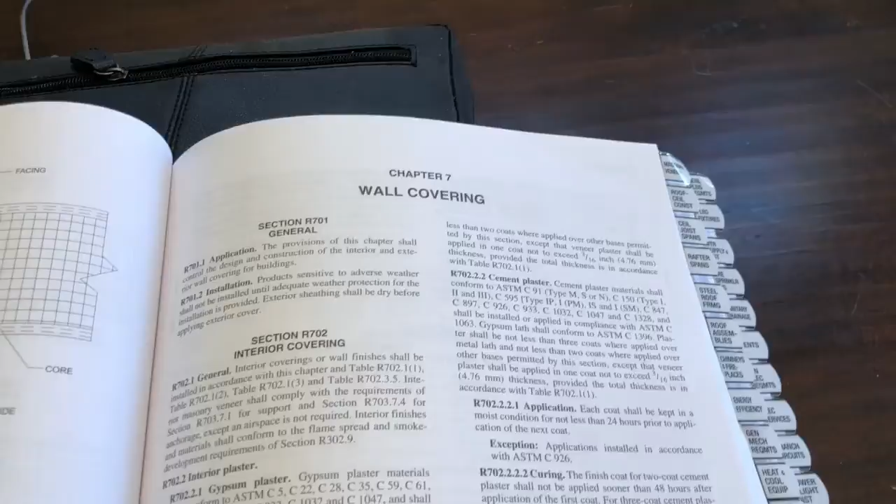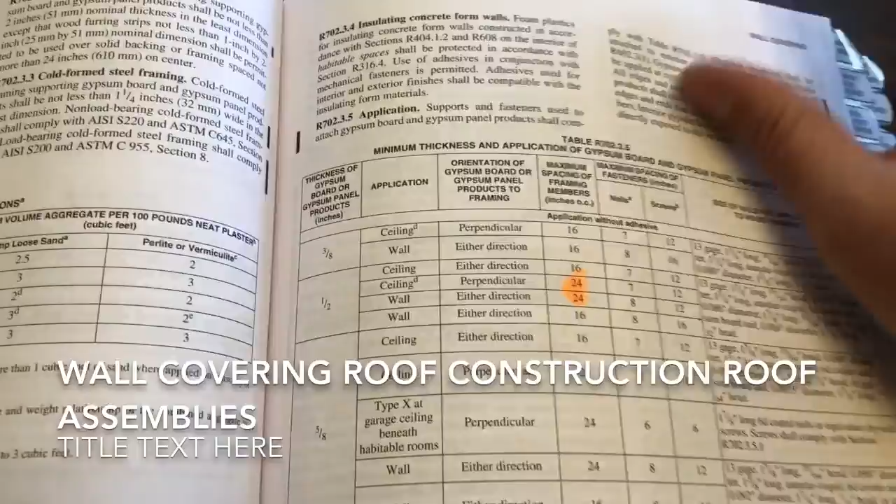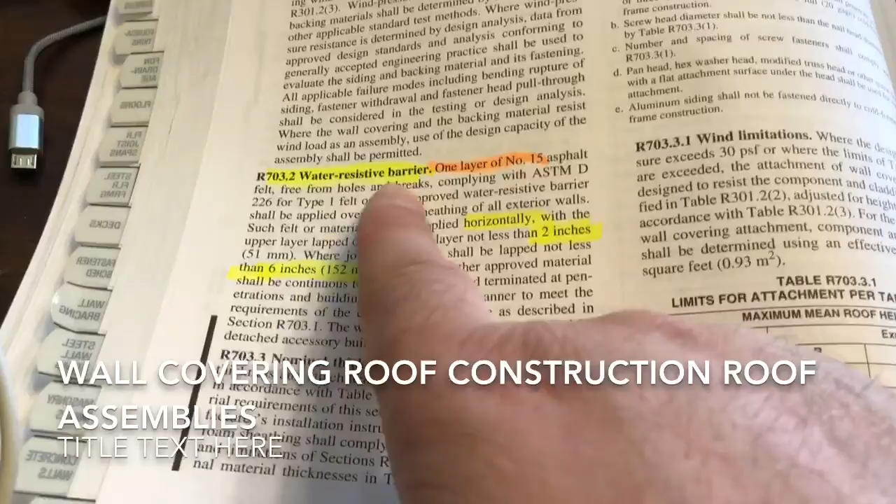Okay, next section is wall covering. Know the maximum spacing for 1/2 inch is 24 inches. Just know this table, it's pretty easy. Got to know how to get to these sections. Anything else? Know that you need a water-resistive barrier, it needs to be number 15. Asphalt needs the lap, the 2-inch and 6-inch rule. Know that.

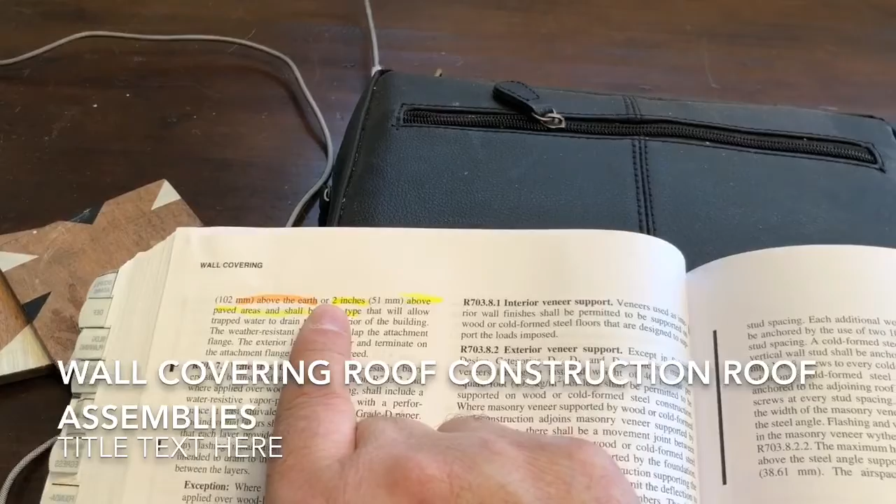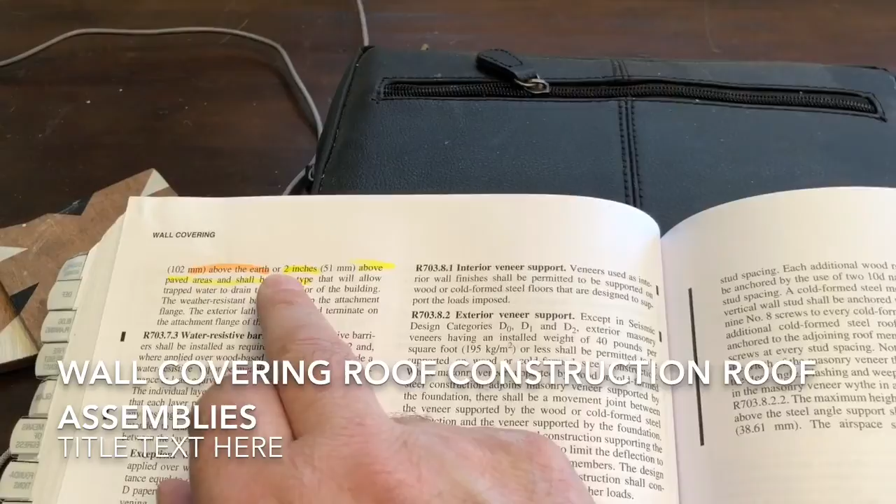Okay, weep screeds, this one comes up quite a bit. So know the 4-inch and 6-inch rule for masonry, but 2 inches above where there's concrete, right? Where you have like a sidewalk outside, you can go to 2 inches minimum, or 4 inches. So know that.

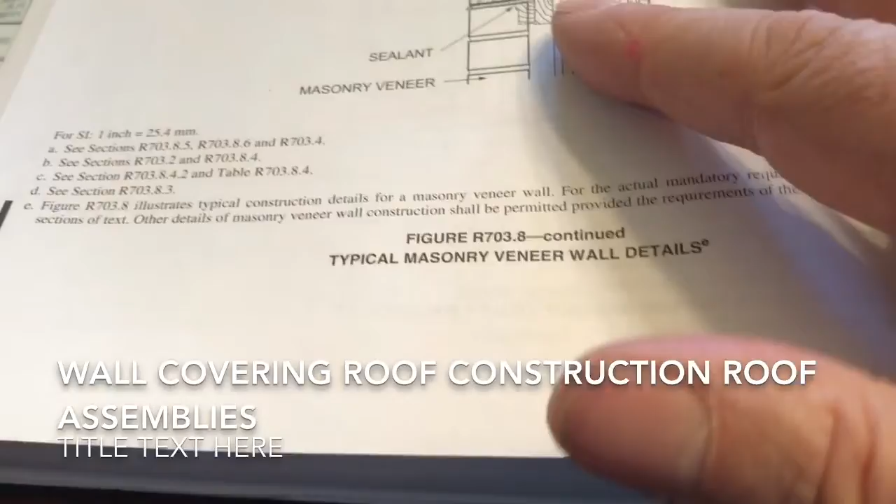Anchored veneer masonry needs to be anchored. I don't know when I got that one, I don't remember that one. I got it highlighted, okay. Know this: the space between your masonry block and your regular wall can either be 1 inch airspace or it could be grouted. So know that space could be either or.

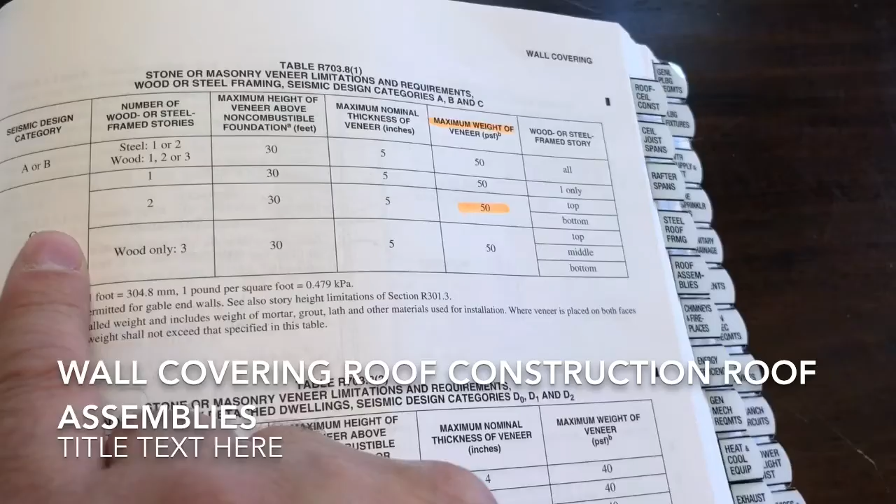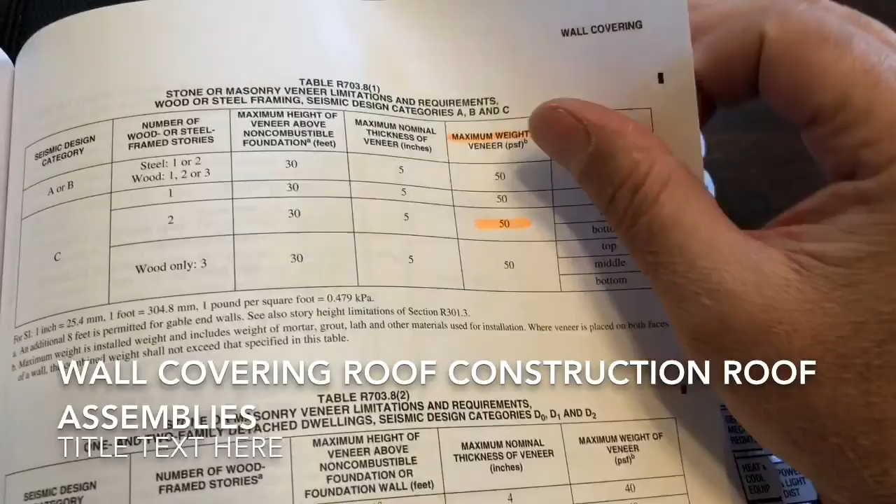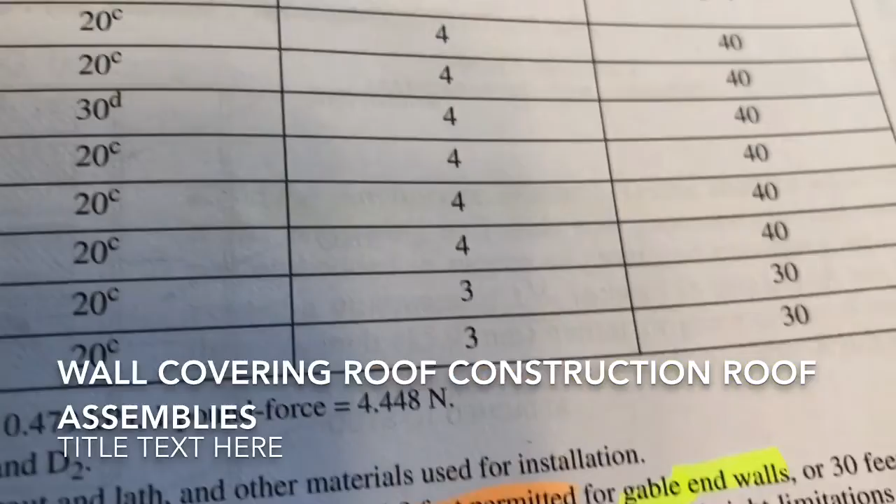The maximum weight for in this category, 2-story, is 50 pounds per square foot for stone masonry veneer. Know this. Know that there's an exception for the height of that, basically it's 20 foot plus 8-foot gable, that gets you to 28 feet. So know that, so you can go above the height that the gable ends. Those are the exception, so don't forget to look at those little footnotes.

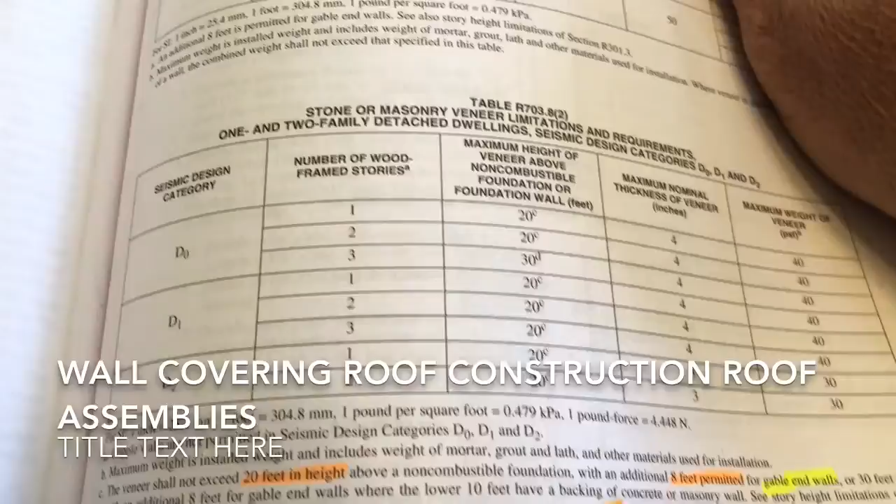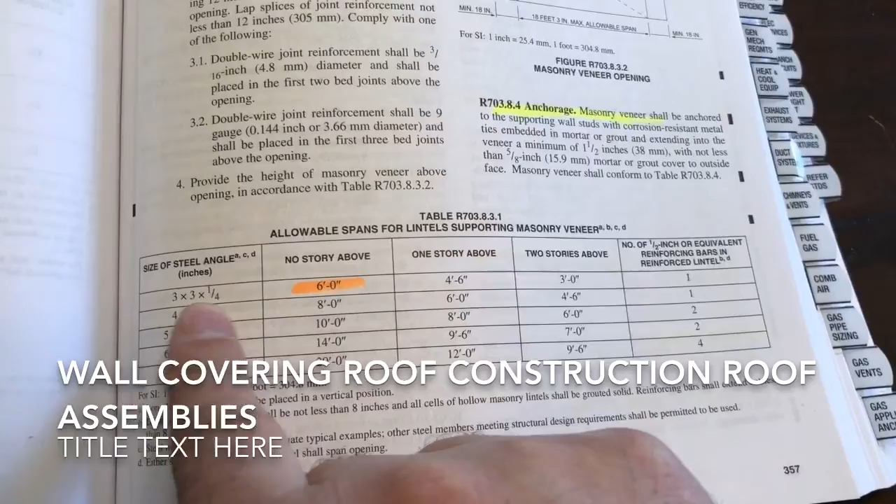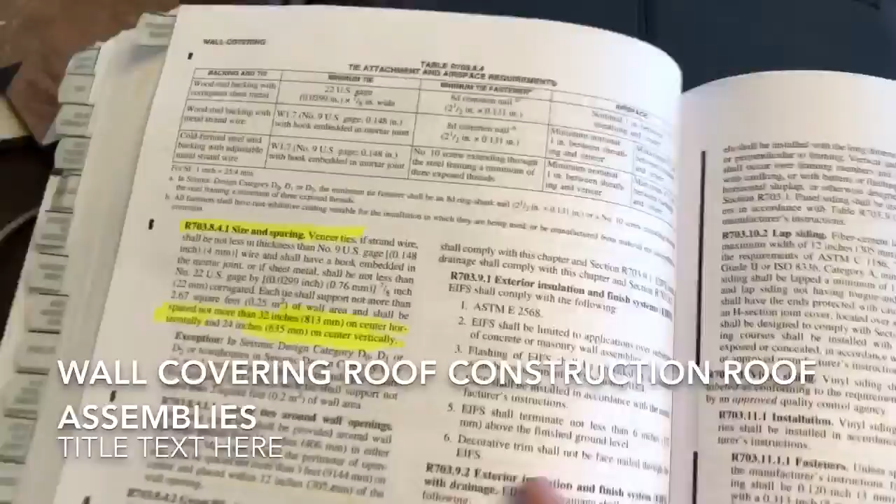Okay, anchorage. Oh, the lintels, it'll just give you a 3x3, and it'll tell you what it is, and 6 foot. So that's basically how I came up with that one. Size and spacing for ties, shall be 24 inches on center. And

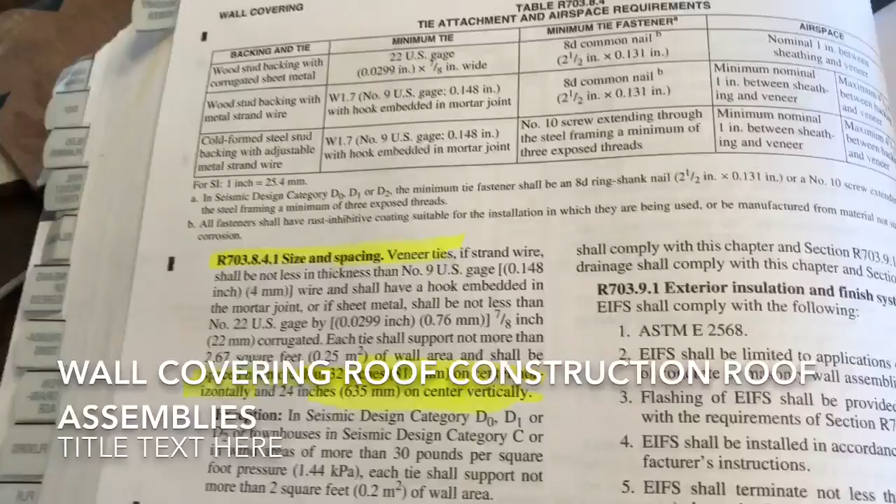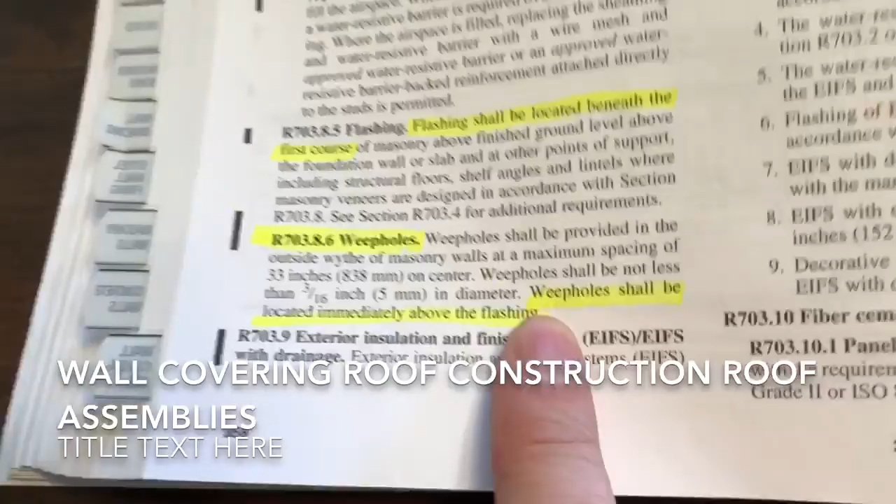Here's the weep holes. Weep holes shall be located immediately above the flashing. That's key. Okay, I don't know if there's any more wall construction. Nope, that's it for wall construction.

Ceiling construction. Know that the ridge board is not less than the depth cut at the end of the rafter. Okay, know that.

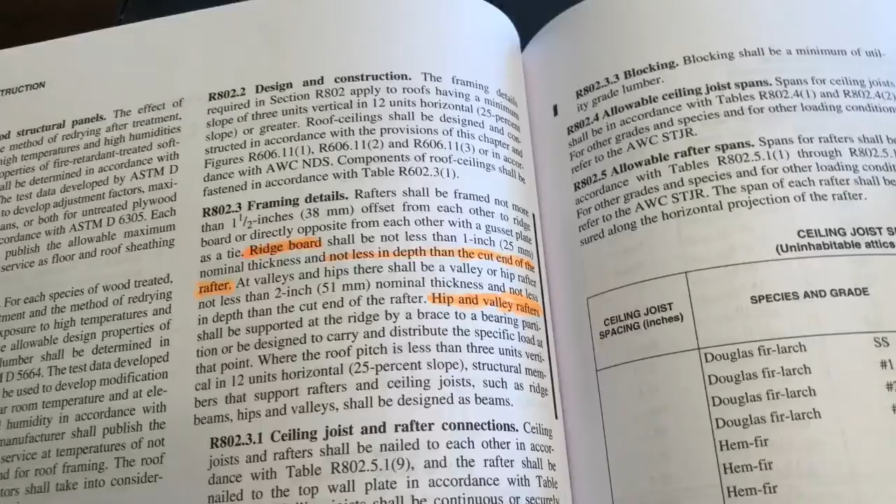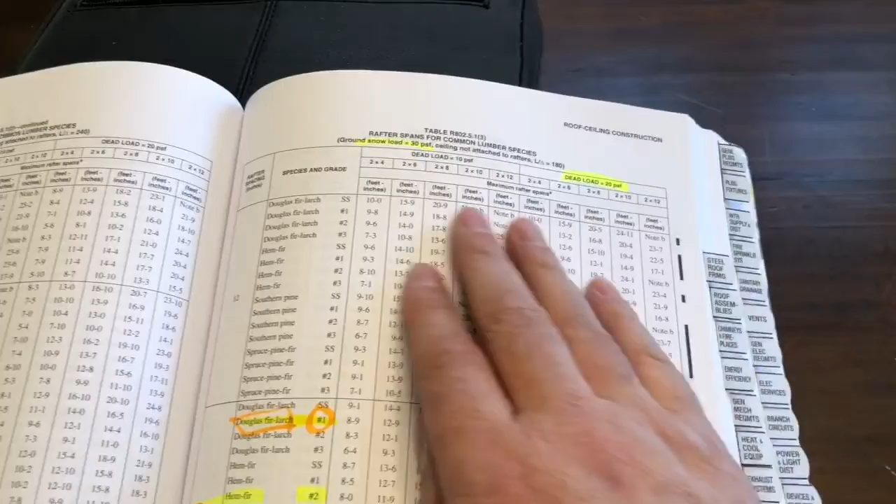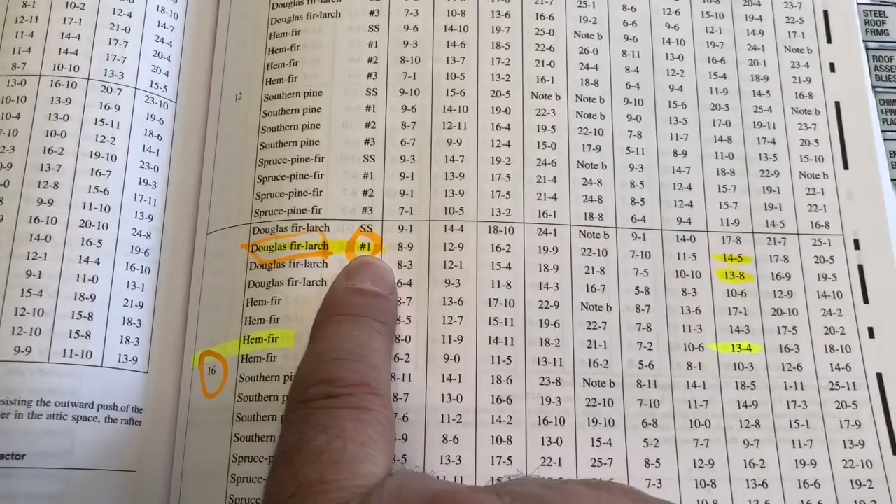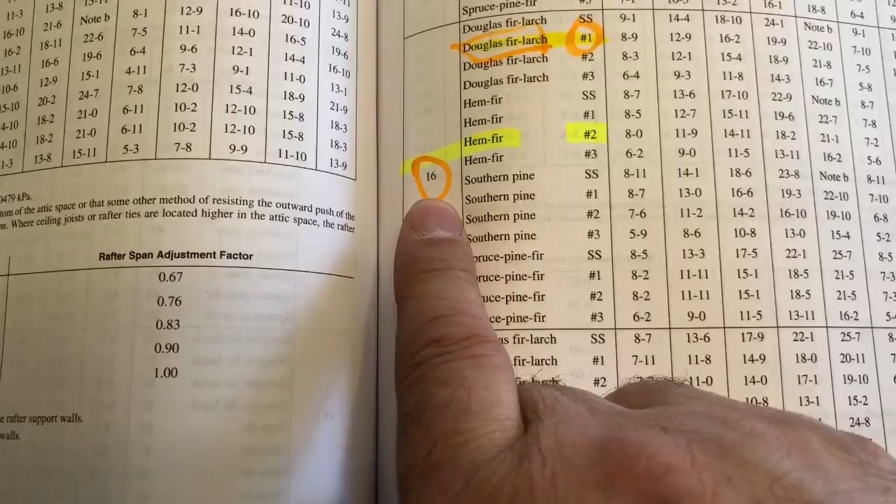These questions, just know these tables, you'll get them. They're going to be giving you the dead load, they're going to tell you the rafters, common rafter spans, they're going to give you maybe the name of the wood that you're using, and maybe the structural strength, and then you'll come up with the allowable 2x8 for that. Or like here, I got a Hem-fir number 2, 13, 16 on center. I got circled, so it was a number 1, 16 on center. So yeah.

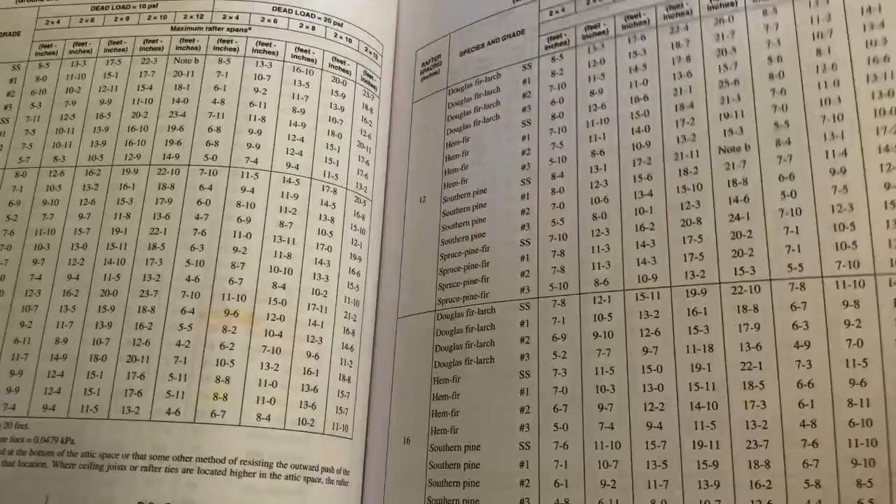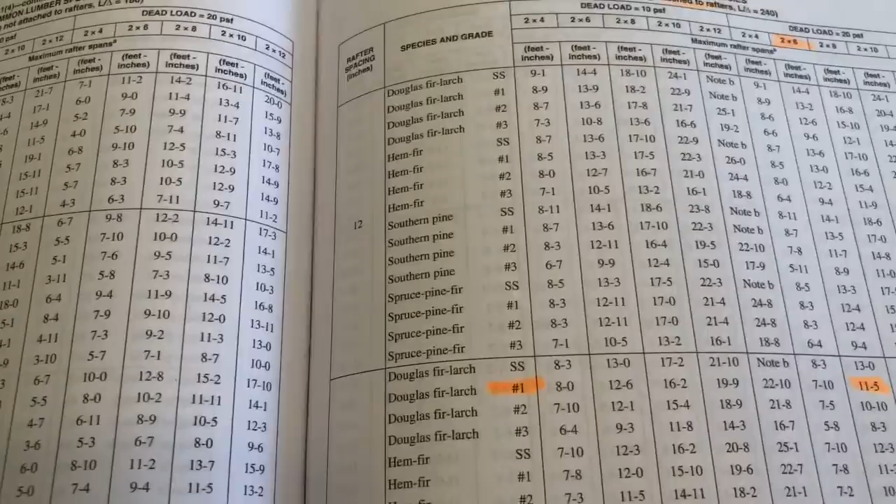Just know how to use these charts, they're pretty easy. Make sure you're reading the question completely, because the question is going to put you in the right chart, remember that. So here you've got using a ground snow load of 30 pounds per square foot and a 2x6, and 16 on center, you can use a number 1 at 11'5". So just know the question, because the question is going to read just like that.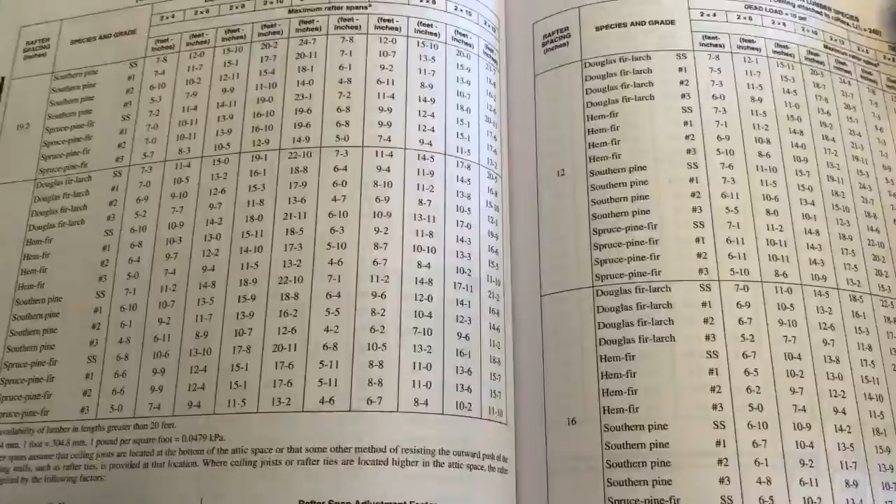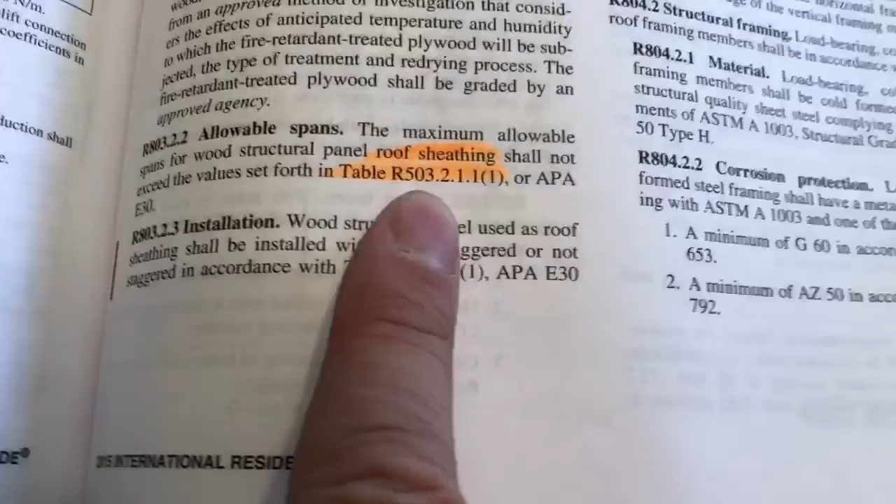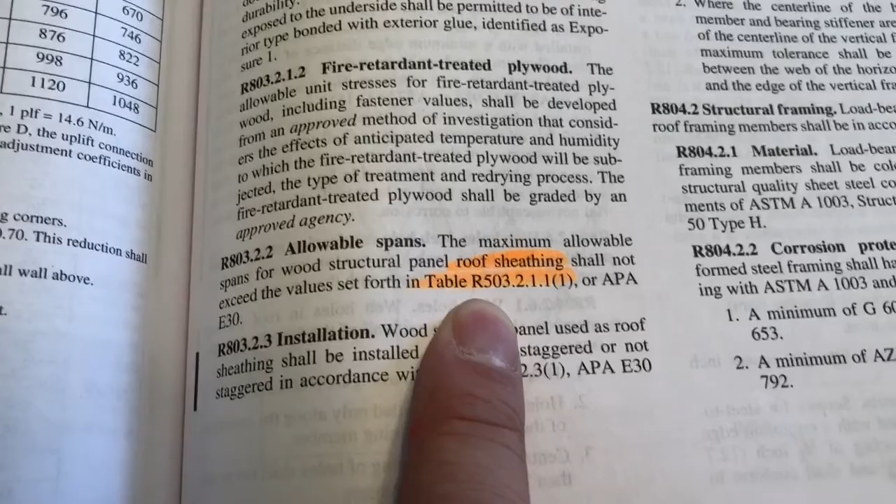Okay, roof sheathing, just refer to this table. Roof sheathing puts you back in the floor section, that's why it's here, so know that. I have it highlighted here just to put me, because you need to know what you can do with a 3/4 inch sheathing for nailing. It puts you back in the floor for the roof. So the sheathing requirements are basically in the same section.

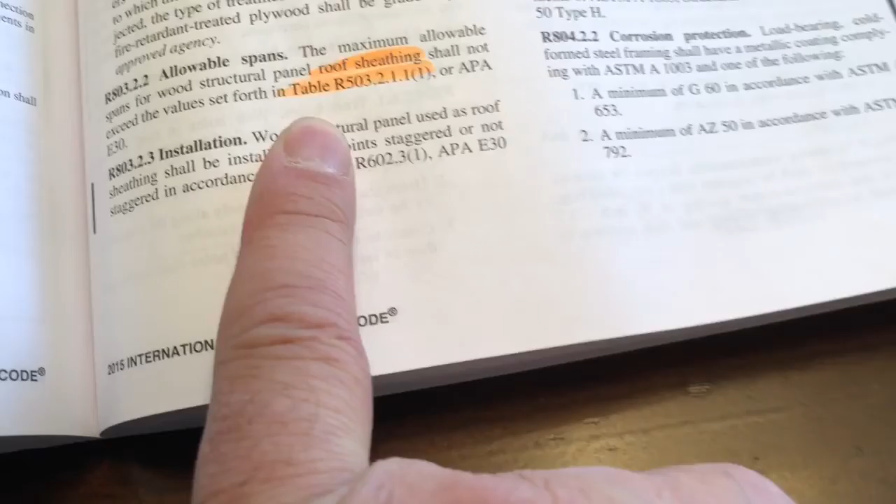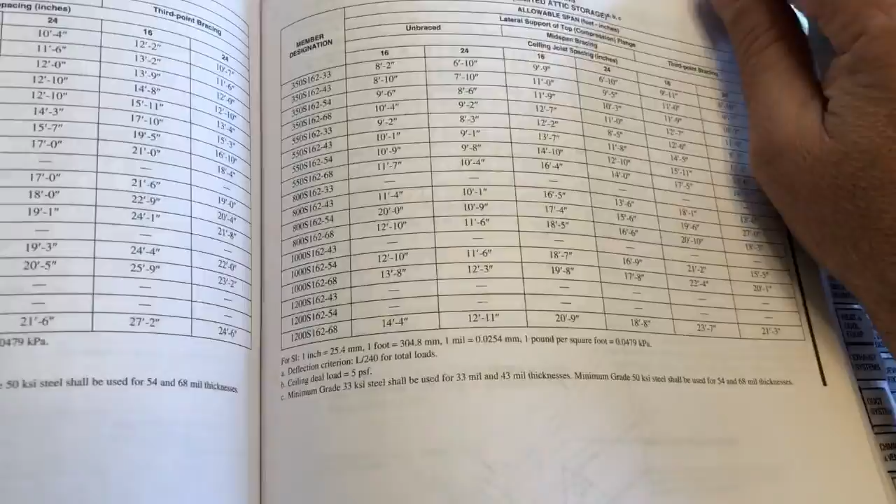Another good thing to know is these little diagrams throughout the books in each section, they'll get you into the right code sections. So each section, I think, like masonry has one, you know.

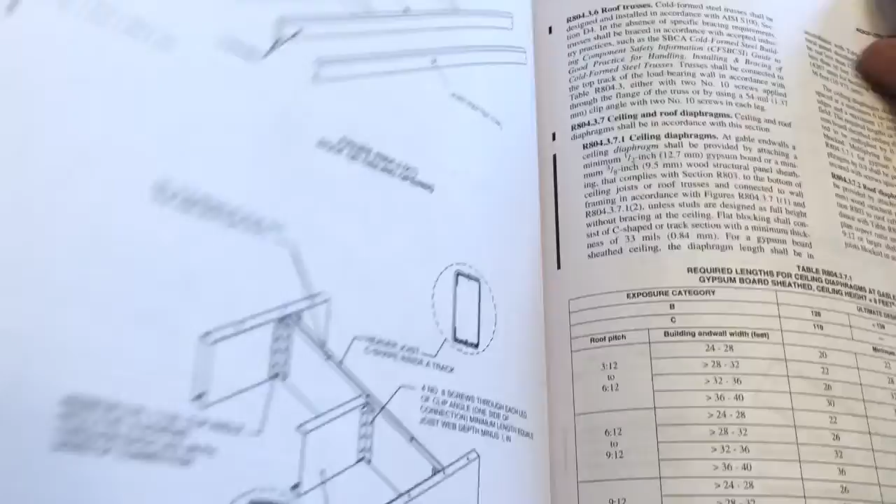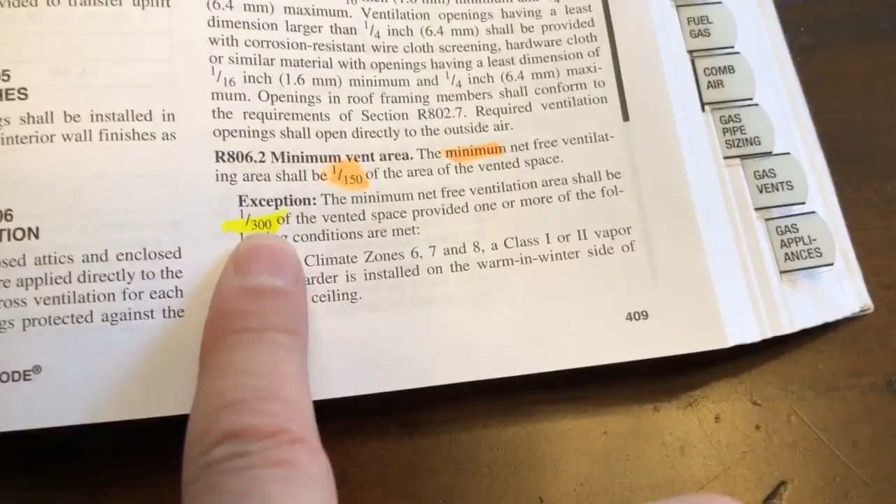Let's see here, roof and ceiling construction, not really that much questions on that one, right? Oh, ventilation, know the ventilation requirements, 1 in 150 minimum ventilation, exception when you have a combination, so 1 in 300, know this area pretty well.

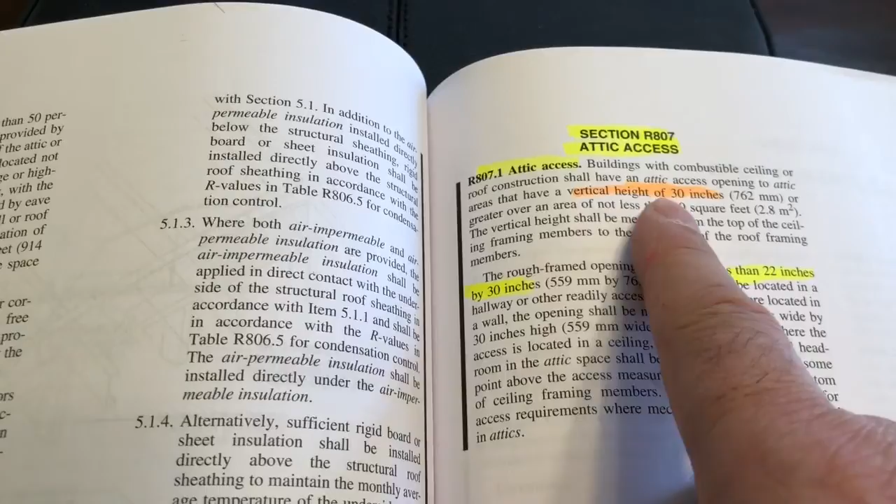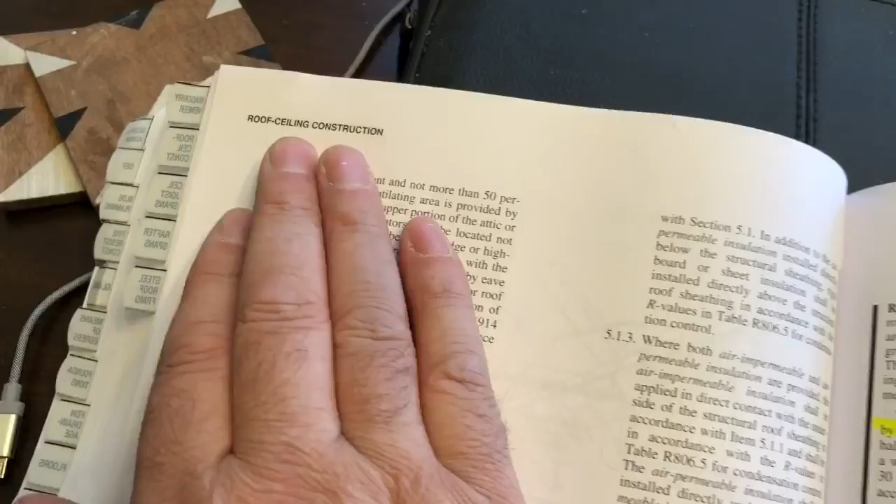Okay, we'll just finish off with attic access. Know that the minimum height is 30 inches above when you get in there, and the access opening is 22 by 30. Just remember that this section is kind of all by itself, right? But it does come right after roof ceiling construction, but it's hard to find. That's why I kind of like to use the table of contents to get you to the areas. But this comes up for sure, right?

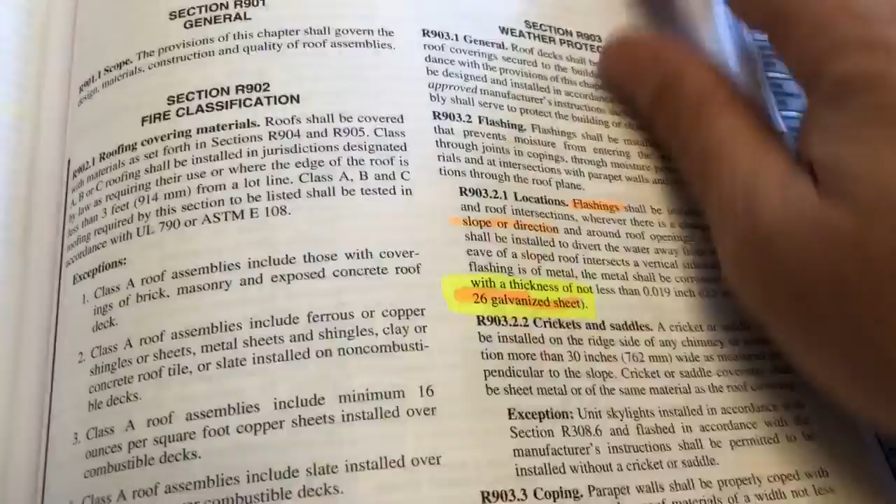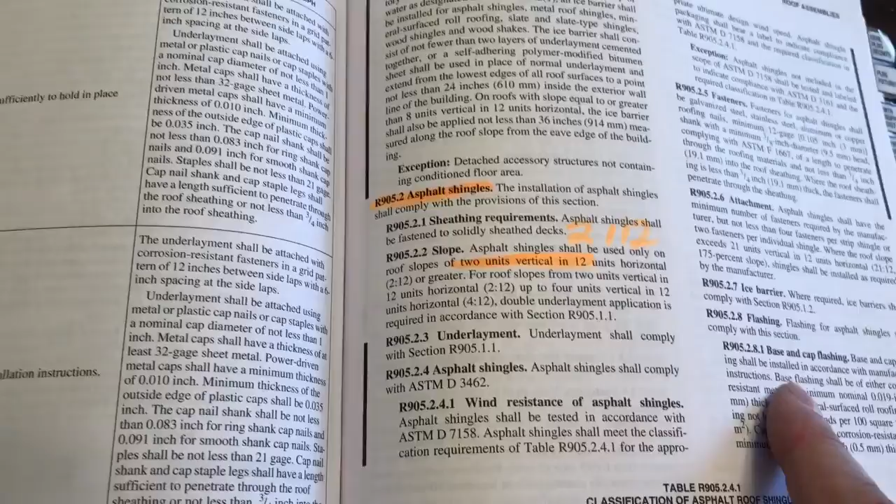Okay, next one's gonna be roof assembly. Roof assemblies is, you know, we're talking about your roof material. For flashing, it's gotta be 26 gauge galvanized sheeting. And then, let's see here. Know the different asphalt shingles, and know each one, it has its own little section. So asphalt shingles can be used at 2 and 12, others you can't use at 2 and 12.

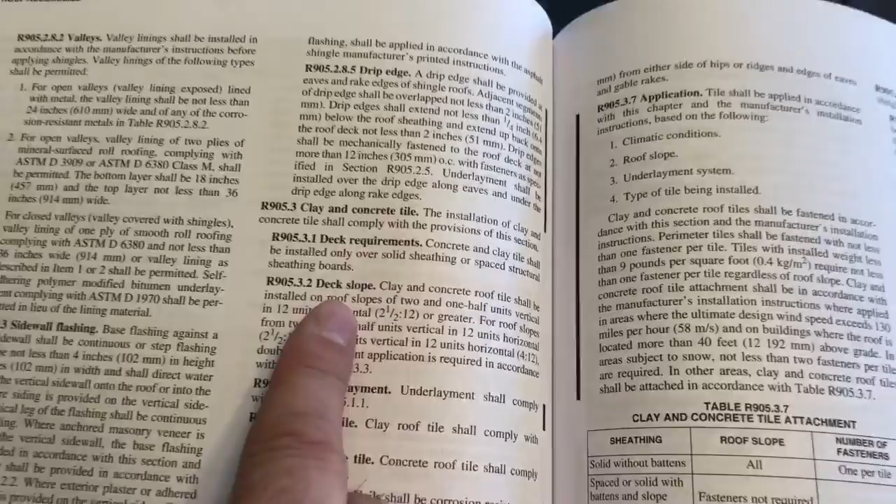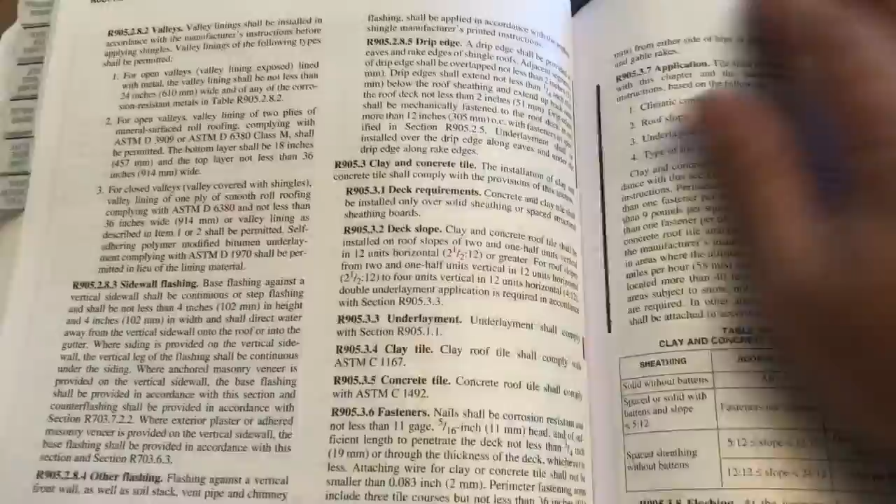For clay concrete tiles might be the 2.5 in 12. So know each one of these. Asphalt shingles I think comes out, so know the asphalt one, but each one has got its own requirement. So just getting through here and knowing them, and that should get you covered for roof assemblies, which is actually roofing material.

Roof recover is not allowed when you have 2 or more applications. So know that, okay, so re-roofs, not when you got 2 or more on there. So know that, obviously. Okay, the next section, we're done with this one.